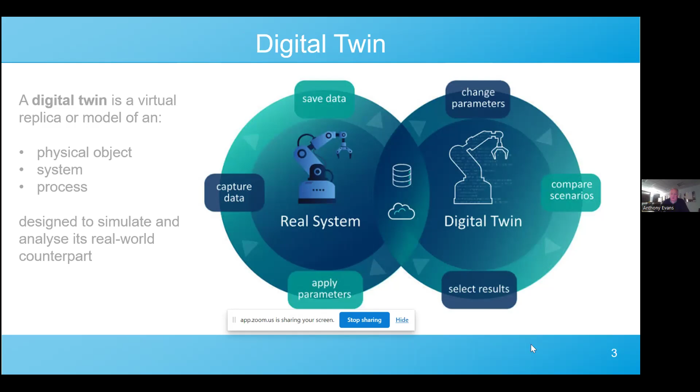Just a little bit more in terms of the twins. The twins use data. The data can be collected from sensors, from historic data. More recently, it's associated with algorithms, particularly associated with casting simulations, and therefore it's replicating physical behaviors and characteristics, but in a digital environment.

The other side of the twins also enables real-time monitoring and informed decision-making processes, particularly when it comes to managing operations and viewing operations—hopefully you'll see as we go through, in terms of much more of a global footprint.

So the two areas that I thought would be useful to look into: firstly, in terms of component designs, and how the digital twin can change the way component designs are not only created, but the outputs from those twins. Quite typically now, in the automotive sector, the old method of crash management and crash simulations of vehicles is dramatically reduced because it is programmed and predicted in terms of a digital mode.

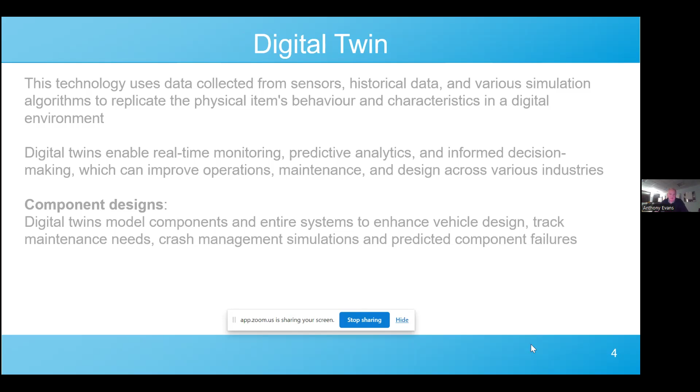The other sector I'm going to look into in more detail is manufacturing, particularly how we're able to simulate manufacturing processes to optimize production, aiming to reduce downtime, and to predict in a much more controlled fashion the product quality which individual cells will be able to produce.

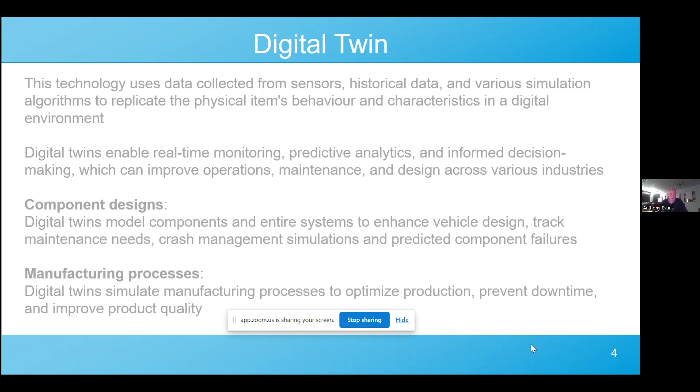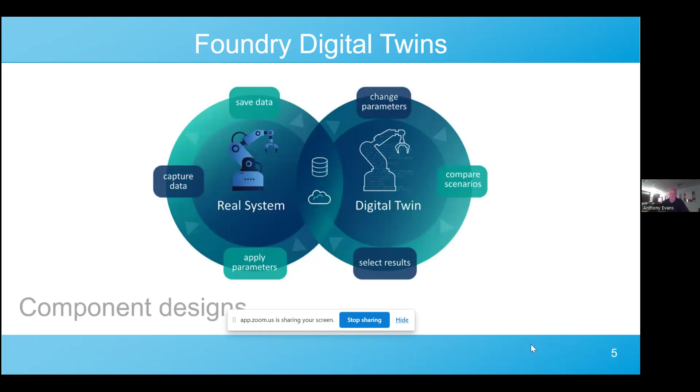So the first area we'll look into is component designs. First, looking at the conventional way components have been designed. I'd like to stress I'm specifically talking about the aluminium sector and predominantly automotive.

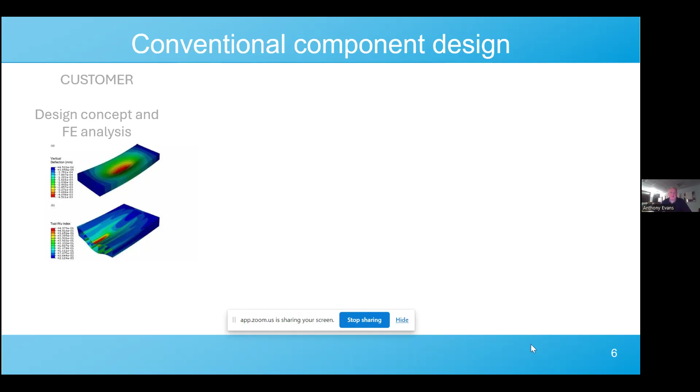Generally speaking, the customer will initially work on their own design concept. They'll create CAD around that design concept, probably come to a decision on their design, and take it through to FE analysis. At that point, they're probably quite entrenched in the design they need to follow.

The normal path would then be passed across to the foundry, where the foundry would complete its casting simulations. But quite frequently it wouldn't stop there. You would have a continuous loop going backwards and forwards between the foundry and the customer. The foundry would want to change things, add draft angles and feeders in certain areas to optimize the component, which then needs to go back to the customer, back through CAD reconcept, back through FE analysis.

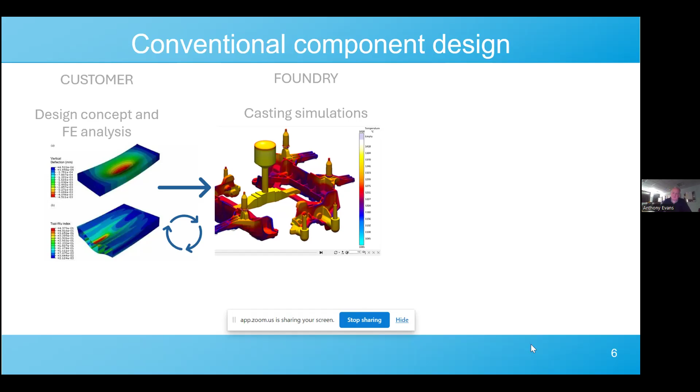But more frequently, even after the foundry and customer have completed their loops, it would then go to the tool makers and particularly the machine shops, who would also want to make their own changes and further optimization. So it would go through an almost continual design change, always converting back to CAD, always going forward to the next person in the supply chain, requesting changes, or frequently modifying the CAD themselves, and sending it back through.

This concept is typically referred to as design silos, with everybody working independently. A big negative is design harmonization - when you're in these design silos, the design frequently keeps going back to the way it's been done before, always reverting back to the past.

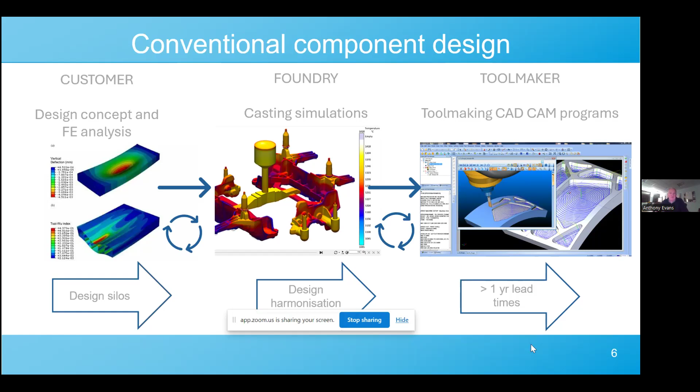Typically it wouldn't be unheard of to experience lead times in excess of, or up to, one year - quite typically from when the design was initiated by the customer, through all the foundry processes, all the tool making and machining design iterations and changes, back up to the customer for a finalized CAD, a rerun of the FE analysis, and back through the supply chain. It really was quite a lengthy time period.

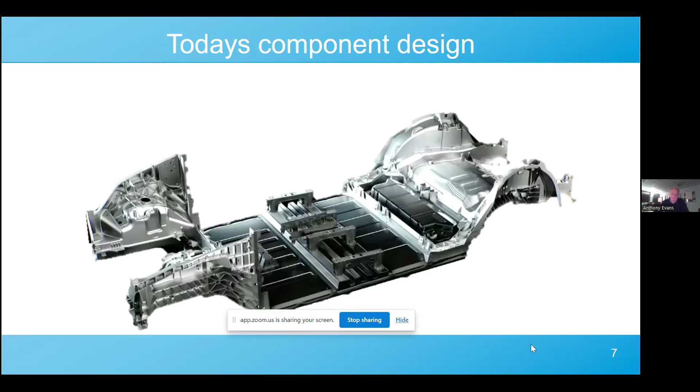Today's components are very different. The majority of components used in the automotive industry are from a topological based design. They've normally had an artificial intelligence interface which has already optimized the design themselves.

This vehicle platform - this is the Tesla platform - has taken probably in excess of 30 individual aluminium die castings, which previously would have been bonded, possibly welded, or joined together, and has driven it down to 3 individual, very large, topological based design components.

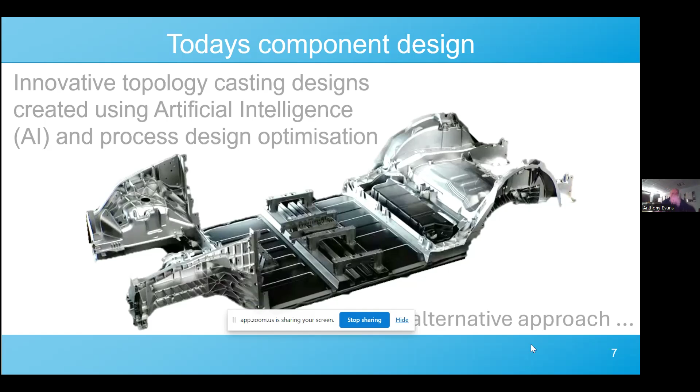So based around these changes, and the fact that the EV market sector works at a much faster pace than traditional automotive design factors, an alternative approach was needed. So now let's look into how some people within the sector have managed to overcome this.

In terms of a technique, and one I've been able to work with more recently, is associated with subdivisional modeling. This was originally utilized in the computer graphics and games industries for animations and movies, where these subdivision bodies are comprised of vertices, edges and faces, which form a mesh of polygons.

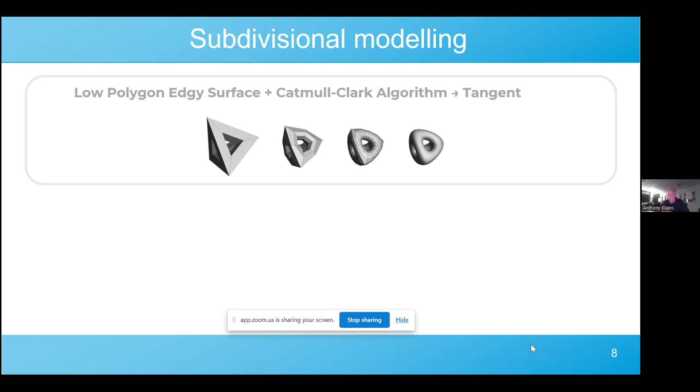Using algorithmic subdivides within the mesh, they're able to create a much smoother tangential and continuous surface. So the edgy pyramid from a low polygon will transform into a smoother, organic shaped object. These concepts started in the games industry, moved into movies, and now come into automotive, and are now much more readily accepted as a concept in the CAD world.

It's interesting to note that this technology within CAD has been implemented in CAD tools for many years, and therefore CAD systems have generally not had any concerns or issues regarding the integration of this method of subdivisional modeling into customers' CAD systems.

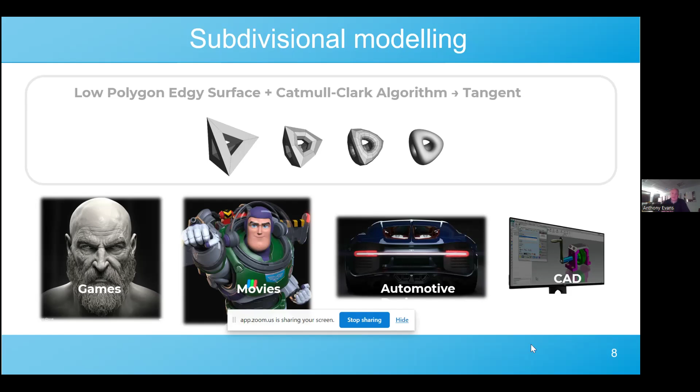I'll try to walk you through how this company, Bionic Mesh, work with topology and work within the CAE modes.

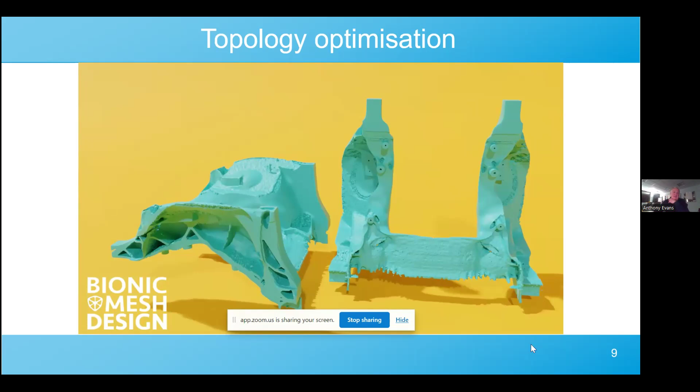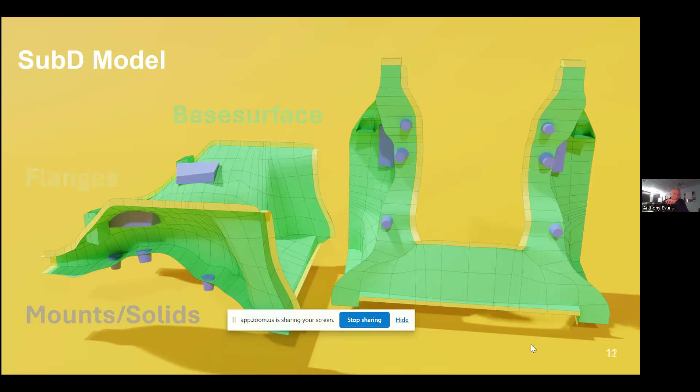So just stepping through, they will create the base surfaces. They will add the flanges onto the designs themselves, and then start to look at the mounts and the solids which will be fixed into the end designs, obviously adding ribs as required in terms of the strengthening.

And all of that work has been completed, and this is a real example. All of that work has been completed within 2 hours. The most important thing to recognize, though, is that all of that work has been completed within CAE. So when I looked at those silos to start with, all of that work has been completed in the first silo in terms of the CAE and the FE.

It's never been worked on in terms of CAD. It will always be created solely in that mode, and they will only create the CAD right at the very last moments.

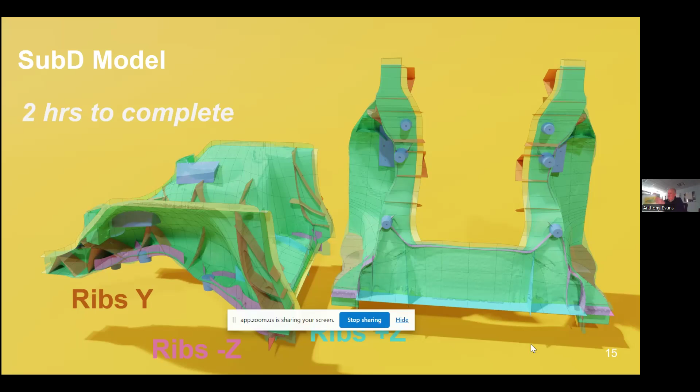But the same goes in terms of the new way of doing the FE. So in terms of the crash management techniques, in terms of the stiffness, the NVH, and fatigue, this is again all managed within the CAE side of things.

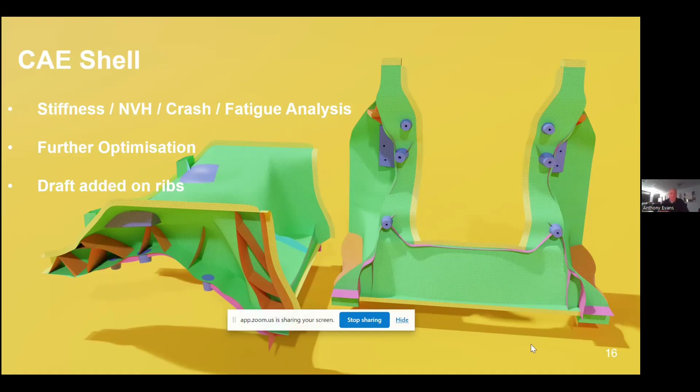Therefore, because it doesn't go from CAE into CAD and then back to CAE, it's fully optimized within the CAE function. Everything is added, so everything which is normally associated with what the foundries would do in terms of the casting optimization, in terms of the draft angles, etc.

That is again added, and that is able to be added because this system is so linked to the casting simulation packages which have been previously run, and as I said, using the algorithms to pull back into this level of CAE.

But again, it is a proven case study that it took a further 2 hours just to complete this level of FE analysis using the techniques that they have available to them.

So they use this technique, a completely different approach to the development of castings for vehicle structures. It is a technique which doesn't follow the traditional sequential approach to component development, taking the customer's CAD through to CAD and CAE loops.

So this fully CAE driven process, in which the design requires virtually no CAD support, and detailed production ready CAD is only generated at the very end of the design cycle. It has massively reduced the lead time in terms of what these suppliers can offer to their automotive customer base.

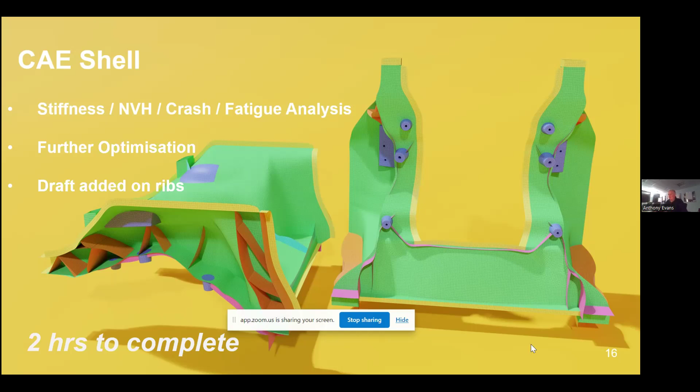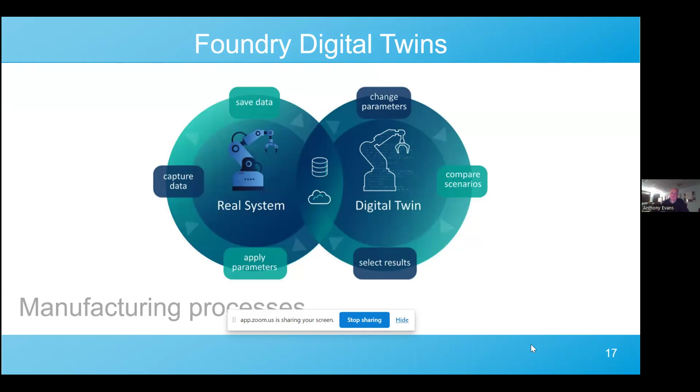The second sector that I'd like to look at in terms of digital twins is associated with the manufacturing processes.

And most of the components that we just looked at are high pressure die cast components. So most of us are aware that high pressure die casting is a really complex manufacturing process. It requires very large tonnage machines to be able to produce these components, and the level of controls associated with all of the other associated processes in terms of trimming or quenching, the automation to extract the components, to spray the dies.

High pressure die casting is renowned for making very fast components, very thin wall components, and components absolutely exactly to net shape. It has possibly always had a bit of a historical issue associated with product quality in terms of downtime and also quality concerns.

But it is a part of our industry, certainly in terms of the aluminium industry, which has always stepped up and has always continually tried to improve what it can offer in terms of its processes, and in terms of the level of improvements that can be made in terms of the materials within the die casting processes themselves.

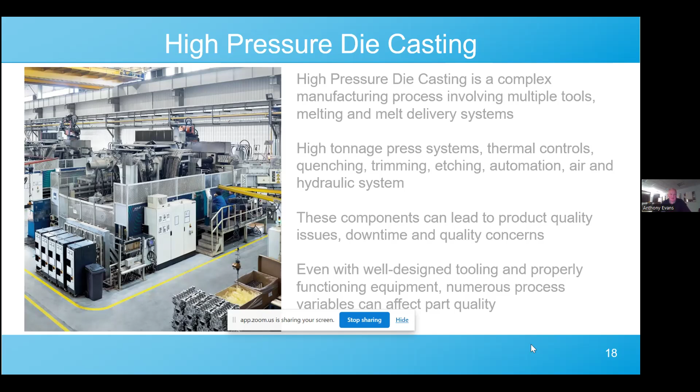So in terms of looking at a digital twin associated with high pressure die casting, typically a high pressure die cast twin will require at least 100, probably more, associated with 120 or 130 individual data inputs which will feed back into the digital twin.

In terms of alloy performance, density measurements, the number of data inputs which could be associated with that element could be quite numerous. And then you've got all the basic fluid and process control and condition monitoring type of normal data outputs from the cells and inputs into the digital twins.

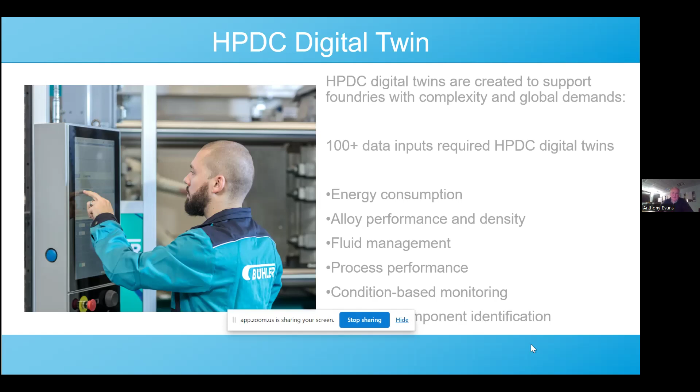So, like I said, it's probably the most complex and challenging area within die casting to actually be associated with a digital twin. But as I said, this sector is very much renowned for rising to that challenge and seeing what opportunities can be developed for their processes and continually improving their equipment bases.

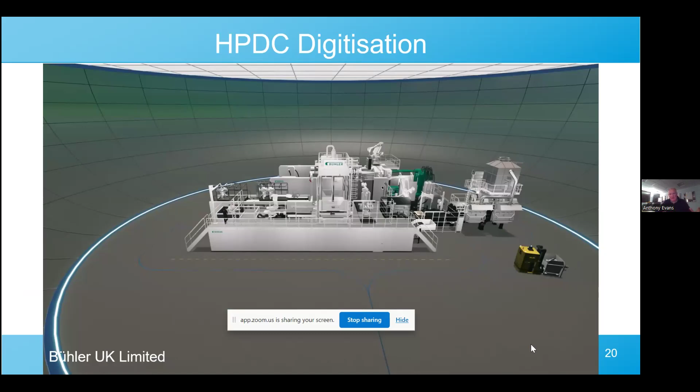In terms of digitalisation, this is just a replica of a digitalisation. What I'd hope you'll be able to see is within this digitalisation, each of those individual data inputs we spoke about, probably 100 or 120, all of those will be outputs from this digitalisation, but are inputs from the real world.

This is not one of Bühler's largest die casting cells, but it is a 9,000 ton die casting machine, so it is a very large die casting cell.

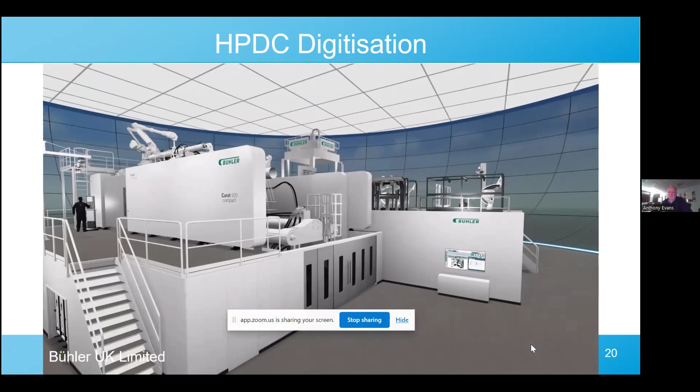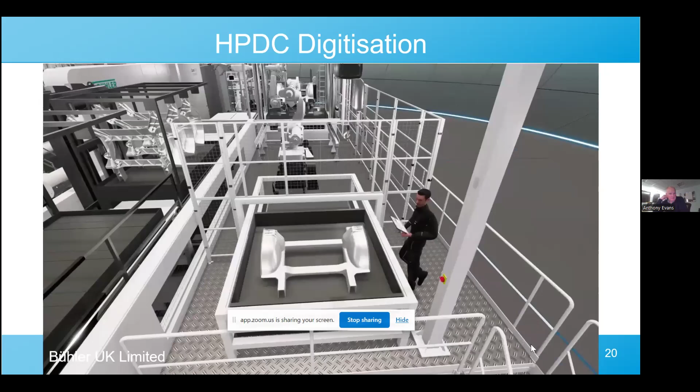The component that is being simulated as manufactured there is very similar to the rear of the Tesla image that we saw a little bit earlier.

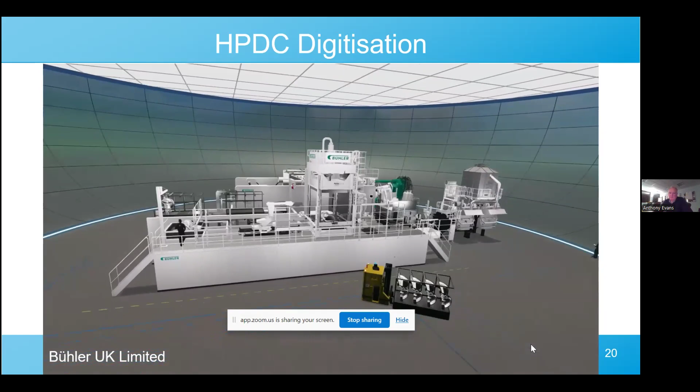If we think about high pressure die casting in terms of the digital twin, the main benefit is in terms of global manufacture and remote access, which is then available for performance data and quality. Although that has always been available based on production output and video capture, the digital twin is able to predict what would be happening from the cells and relate back to that performance data, which is actually achieved by each of the individual global platforms.

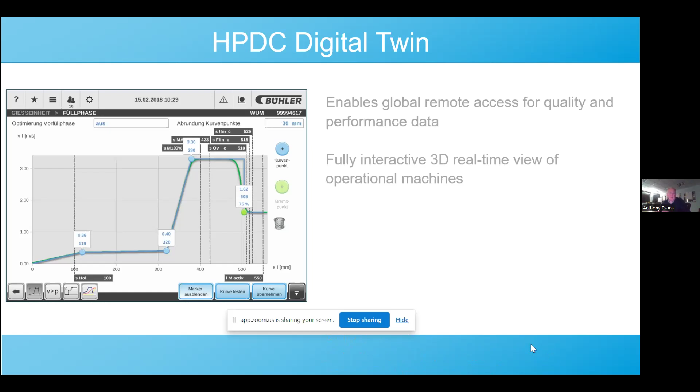As I say, it's fully interactive. It would be back to that real-time viewer type of example that we've just looked at. Everything is available in terms of real-time measurement, but the most important thing is it's not only a recording tool now, it's actually a tool which you can use to affect the casting process wherever you would be positioned around the world.

It's also taken a much bigger step forward to create the ability for AI decision making associated with fully autonomous production. I think we could all appreciate that if customers need to have their individual machines much closer, if not on the site of the individual car manufacturing plants, because of the size of these components, they're not able to be shipped around the world. So there's much more of these large die casting cells remotely associated around the world.

The digital twinning is giving the control and the ability to predict what will come out from the actual casting process. But as I said, it really is taking us much more into a world closer to AI decision making, and in terms of what really we should be changing on a daily basis associated with the production.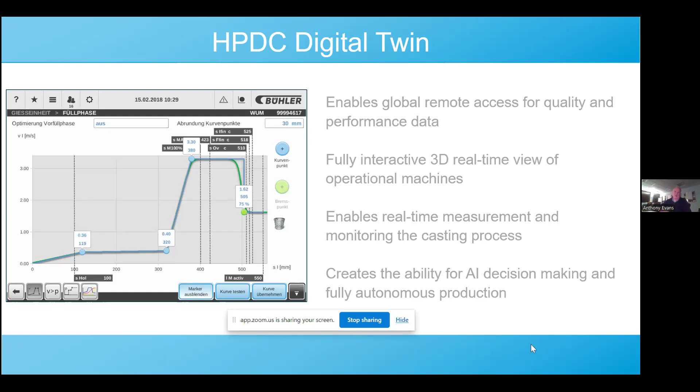So then just trying to have a think about what's next. For me, the what next is really associated with Industry 4.0. We've touched on what is remote in terms of the remote access. The big advantage of high pressure die casting machines is their connectivity, which is available for all of the machines wherever they are.

The real-time measurement and therefore the retrospective analysis using big data type techniques. But then if you think about it, that lends itself to IoT-based decision making about self-management, optimization for performance and quality, and starting to really close down in terms of a true Industry 4.0 process.

Finally, then, it would be the integration and the ability to monitor and enhance the casting process. Obviously, energy consumption and reduction is critical to absolutely every foundry environment, but the ability to link in properly accurate and measured equipment conditions. So with that, I think you can begin to see how the majority of the elements associated with Industry 4.0 can be achieved using aluminium die casting and the digital twin techniques.

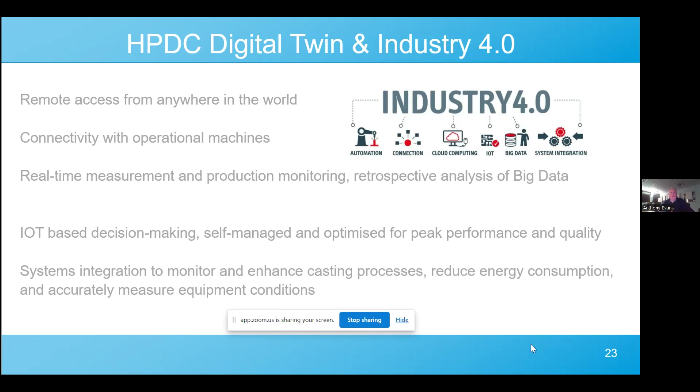I'd just like to really close now in terms of the further advantages that I see for digitalisation and our industry. In terms of our industry, we have the best in terms of world-class academic institutions who are specialising in the liquid metal processes. And then there's also a whole raft of global professionals who sit underneath that academic structure that we have within the UK.

Our industry, not just talking about aluminium now, but going back further to other materials, we've operated the absolute blueprint for the circular economy for over 3,000 years. Everything the other industries want to try to achieve in terms of sustainability and the circular economy, it's something that our industry does and has always done throughout its whole lifetime.

I personally do believe that for the organisations within the UK, those who adopt this sort of level of innovation and technologies, and probably focus more towards niche volume, higher value markets, have a great ability to maintain a competitive advantage for all of our industry sector.